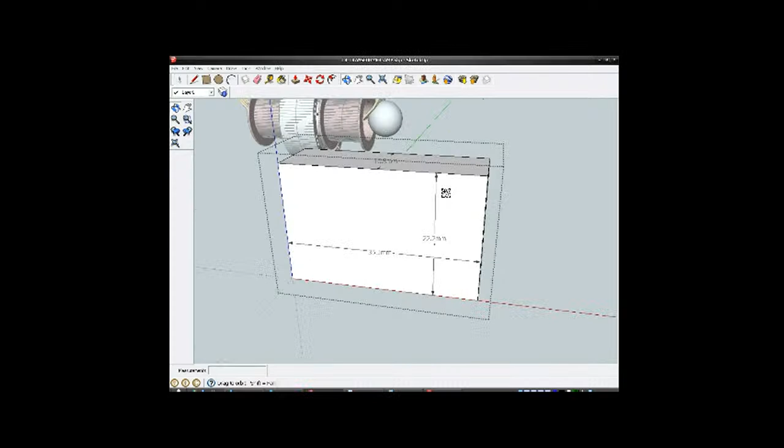Okay, so I've got to make these corner brackets. I'm using this rectangular box I made earlier. I've got the chat open on the phone, so I can see chat on the phone. So what I've got to do is make this box rectangular to begin with.

The balls are 20 millimeters, so 20 millimeters minimum. I'm going to calculate the size of the square which I'm going to use to make a right sort of corner bracket. And then I'm going to be using some ferrite rings as a coupler.

I don't want... my back's playing up again today.

I don't want the ends of the rods coming into contact with a round ball, round surface, because that creates a whole bunch of problems. So I'm going to use a ferrite ring to basically push up against the ball bearing, which will help give me a flat surface where I can intersect with the steel.

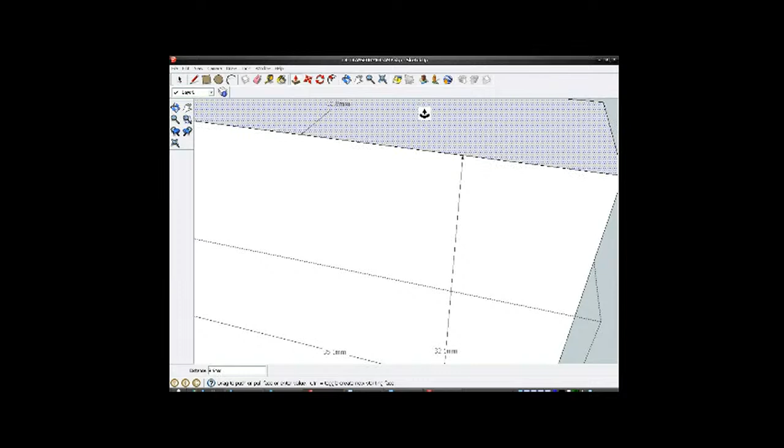Let's see, I'm gonna go up to 32. Oops, if I can get this right. Damn it, my mouse is jumpy. Right, that's 32 that way. That one's too big, so that one wants to come down. Right, so 32 by 32.

So if I've got a ring on there, the ring diameter is 21, we'll call it 21.83, but we're going to call it 22. I want a bit extra on there. So that wants to be actually half of 22, because this is half of it. So half of 22, that's 11, so that wants to come up to 11 millimeters.

So that's what I've got there. I'll just zoom in case you can't see it. So I've got 11 millimeters that way. 32, 32. Right.

Now I need to create a wall. So I was saying 2 millimeters, so I'm going to go in 2 millimeters. Oh yeah, that should work. Let's just carry on. I need another wall here, 2 millimeters.

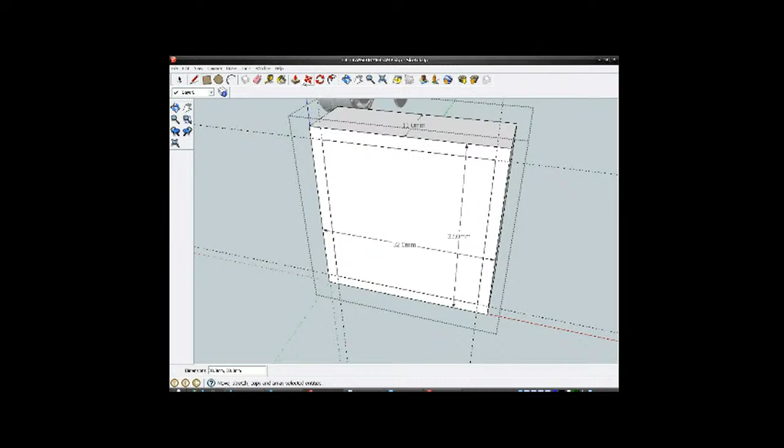I'm going to think about this carefully as I'm doing it, because I don't want to make any boo-boos. Right, next phase is to create a box inside a box. So I want to go across here to there. I'll push that in 9 millimeters. So I've got half a box there.

I was thinking about this last night, trying to work it out in my head, how I was going to go about doing this, and after a while I just couldn't get to sleep because I was spending too much time thinking about it. So I decided I'm just going to forget it and do it tomorrow. I'll just do what I'm doing now, because it's easy to adapt your design as you're going through it.

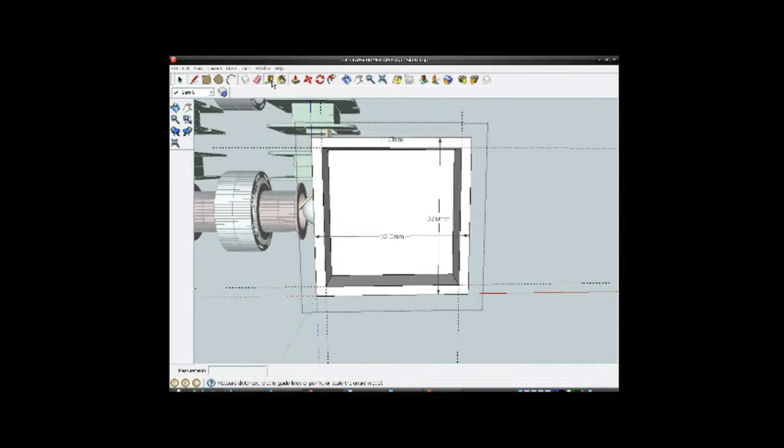Right, so we're going to have half... let's see, if I have to make it slightly bigger or smaller I can do that, but we just need somewhere to start. Right, the ball is 20 millimeters, so that means I want to come in... let's see, I'm going to come in at 11.

Oh, hang on, because of the thickness of the... no, I forget the thickness of the wall. So I'm going to come in 11, that way as well, and the ball will be on the corner. I think that's right.

Let's just try it and see. So that'll be 20. No, sorry, 10. And the ball will be 20. So that's where the ball would go in, right? It would sit between two. But I want to have that open-ended so it's springy, so I'll show you what I mean in a minute.

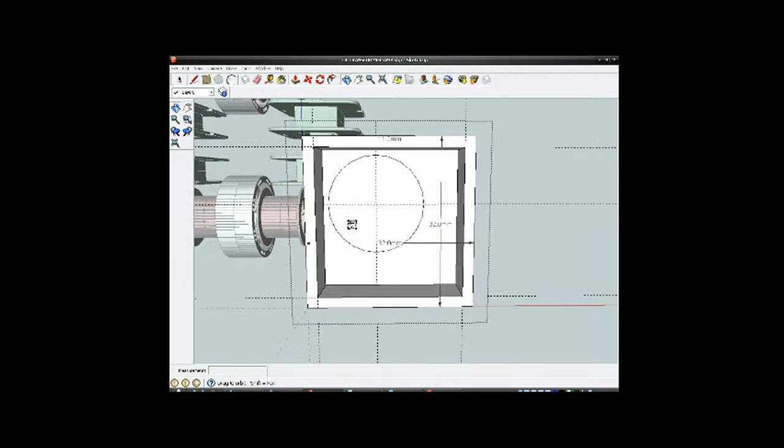So what I need to do is measure between there and there. That's 7mm, so let's see, better if I measure it from the other end. Well, it's 7 plus 2, so it's 9, so I need to come 9mm up here. 9.

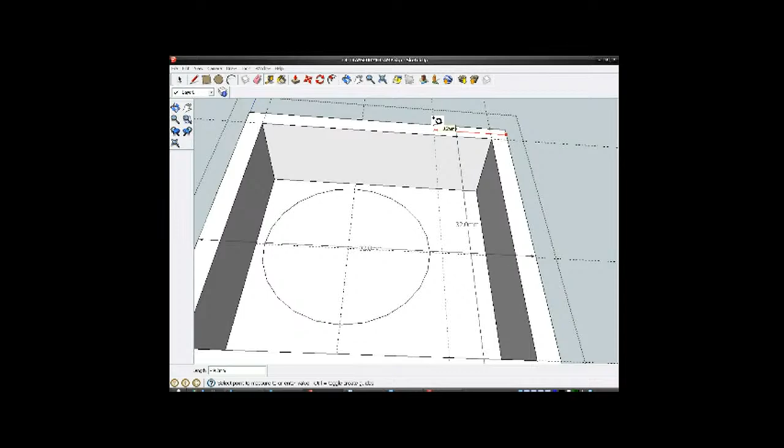I need to cut that. I've messed up my measurements now. I'll have to get rid of those in a minute. Let me just erase those things because they're jumping all over the place.

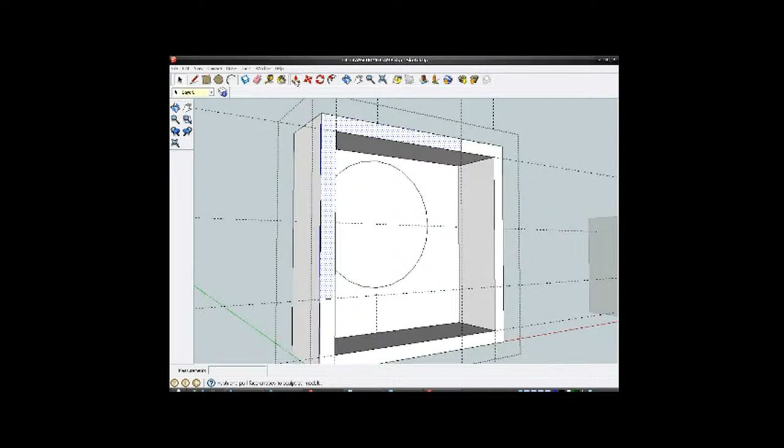Right, so I need to bring that ball down on those. This is half, there'll be 2 halves to this, so I'll bring that wall down to the surface like that. And the ball will pop in between those 2. Let's just push this all the way through. Right.

Just take that out. Right, so that's half. It'd be easy to print 2 halves and stick them together, you see. So basically I have to think about this as half of a bracket.

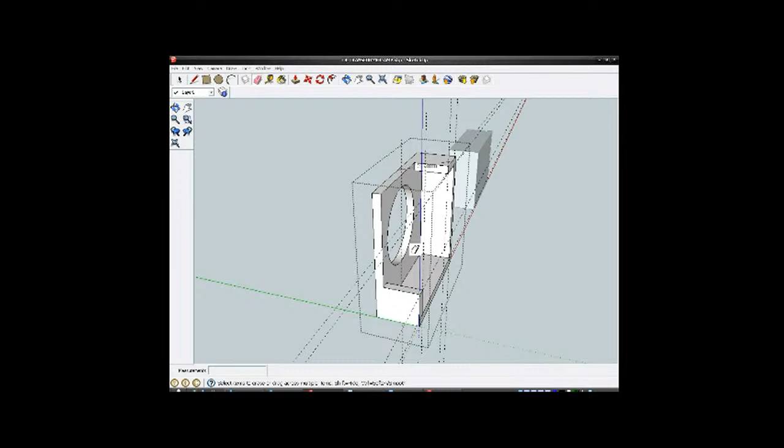I've got a lot of lines now, so I'm going to get rid of all these lines. Delete guides. Right, so the ferrite parts are going to be fiddly. They're going to be really fiddly, to get them just right, because I need to be cutting half a circle basically.

Oh, actually I need to go back. I need to undo some deletions because I've just realised something. Go back. I'll leave that line there. Right, I'll just get rid of the guides again. I'll show you why.

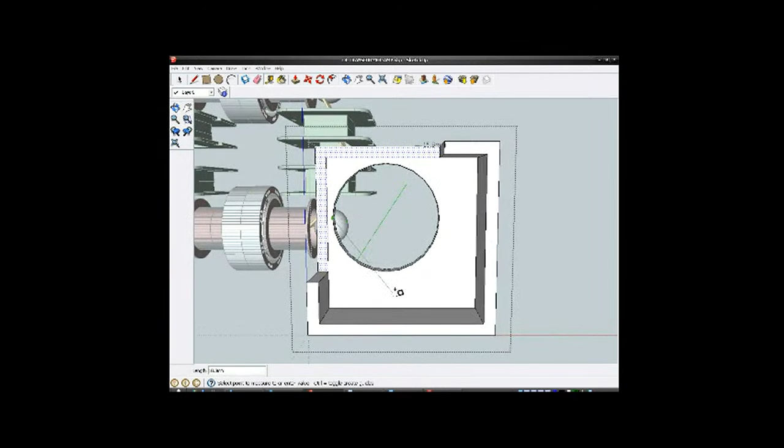I need some slots in this for the ferrite. Let me just measure the distance here, between there. That's 3mm. Oh, actually no, it's in the wrong side.

Ferrites are 8mm, and they'll be going down this way. So yeah, those other lines need to go. So that one, that one.

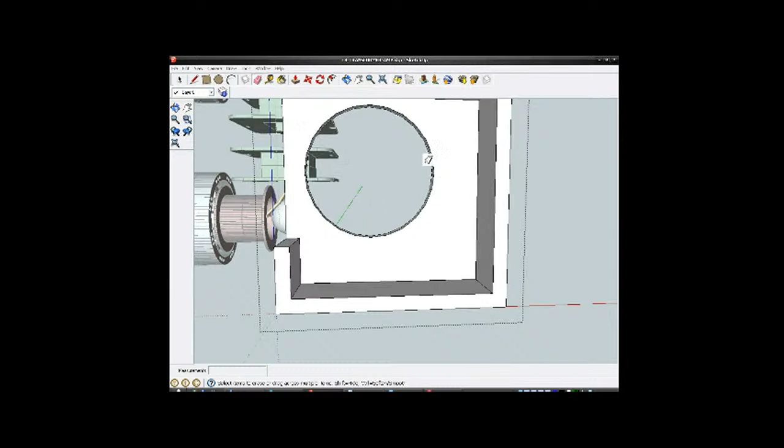So yeah, that's okay. So let's see. I want the centre. I actually need to make that circle a little bit rounder, but it'll be alright. It's alright. So I need... let's see, that's 8, that's 9, so yeah.

I'm not sure I've got this the right thickness. The ball's going to be 20mm. It's going to be sitting inside this, so it's going to be recessed slightly. Actually, that hole, I've just realised it's too big because the ball's just going to fall straight through it. Damn!

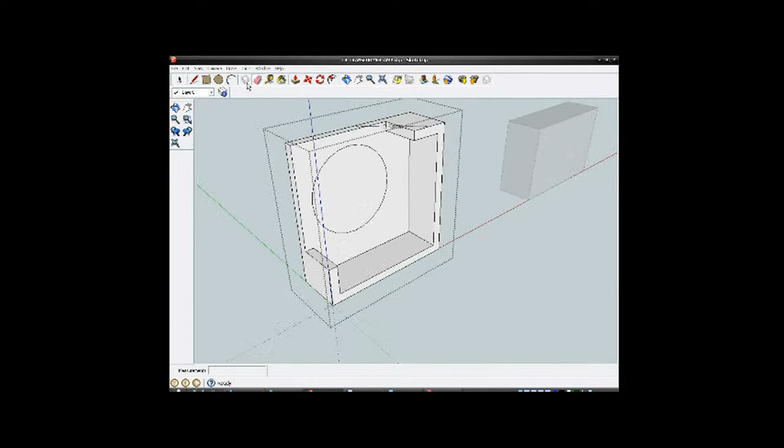I just realised what I've done wrong. I need to find the centre a minute, hang on. Yeah, the hole doesn't want to be the full diameter of the ball, otherwise it will fall out. So it can be a bit smaller, so it wants to be, let's call it...

Holy, my ruler's not working. I'll just cut another circle, just a minute. So it wants to be... yeah, about, we'll call it 5mm. Because that's 10mm diameter. That's half the size of the ball.

Right, get rid of that line. Punch through. Right, so the ball will sit in that hole without falling all the way through. You have to push the ball in there and then intersect with the... Now this confuses me, this bit, because depending on how deep the ball sits will depend on the alignment.

You know what I'm going to have to do is I'm going to have to print this out really, because I can't figure it out. It's very complicated because the ball's round and it's sitting in a round hole.

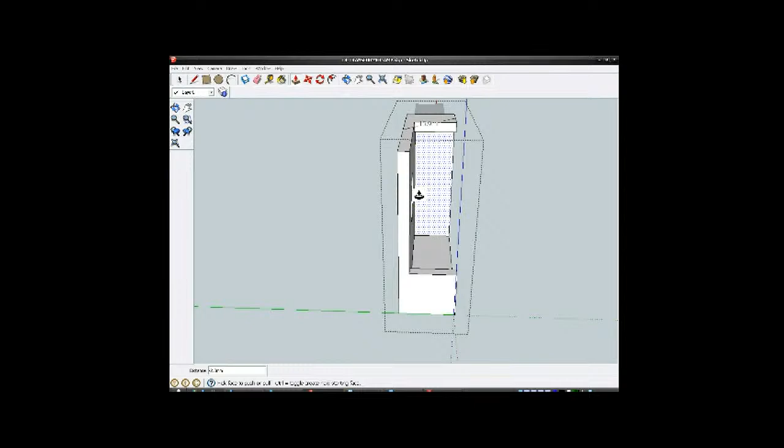It's going to be recessed slightly, so the ball itself will actually be offset from the centre axis, if you know what I mean. So the line, the actual middle of the ball, will be further down. And so what I'll have to do is I'll have to print one of these out and take some new measurements to work it out, because I can't figure it out in my head. It's just very complicated.

Because I've got to line up the ferrite rings to lay on the ball, and to do that, to make the part where the ferrite rings are actually coming through here, actually get that in the right place. I could take a guess, I suppose, because whenever you're working with something round, it's always complicated.

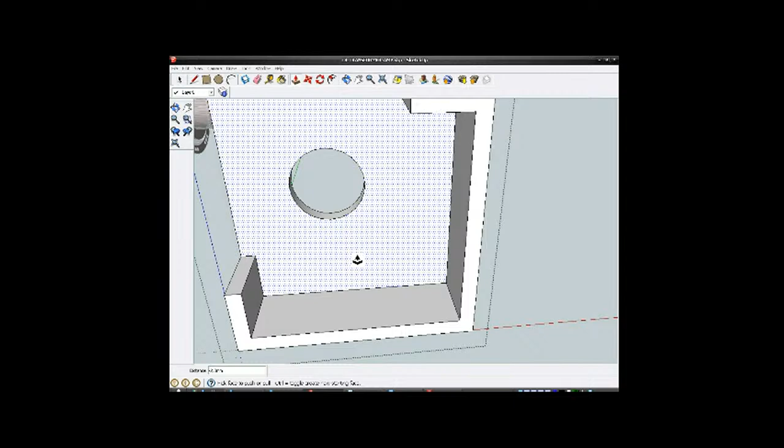When you're working with straight lines, rectangles and things, you've got straight lines to measure. Round surfaces are very, very geometrically complex, and I get confused with math. I really do.

So let me get rid of that measurement because I don't need that now. Right, okay. Well, the alignment between this for this is okay.

So if I bring some lines down here, right, I've got some lines down to the bottom. That will be okay. It's just the distance between this wall here. Let me just check the distance between that wall there and this halfway mark here is where I'm going to have problems.

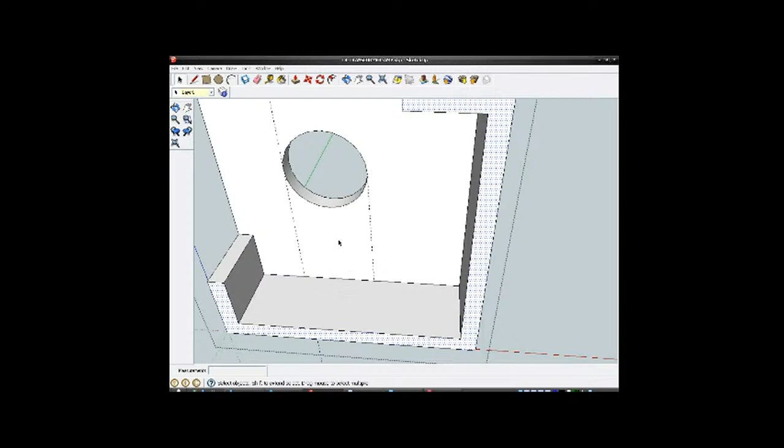The part I'm confused about is how, where the centre is in this plane from the back to the front. What the centre point will be. Right.

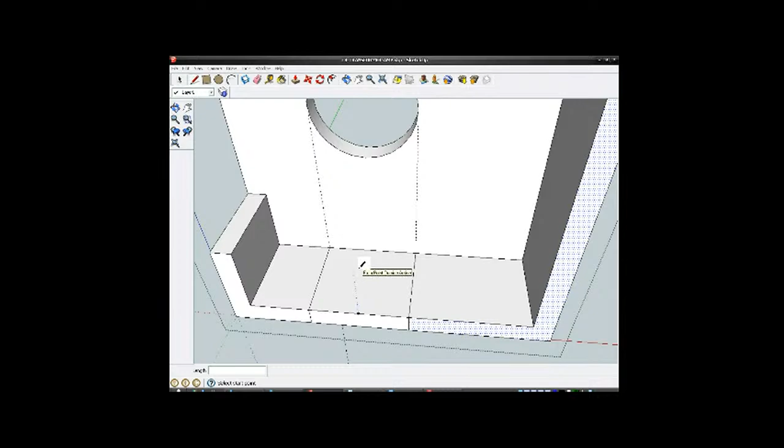Oh, actually, I've just thought of something. I could make it adjustable. So the ferrite ring, when it sits in, it can be moved around. I could do that. So the ferrite ring, because it's round, would be - let's see if I can find the centre on this. Let's see what the centre is. 10mm, so it'd be 5mm right there.

So that's the middle 5mm point. But I don't know where the centre going on this axis would be. I suspect - because I've got that - this wall needs to go a little bit further back anyway.

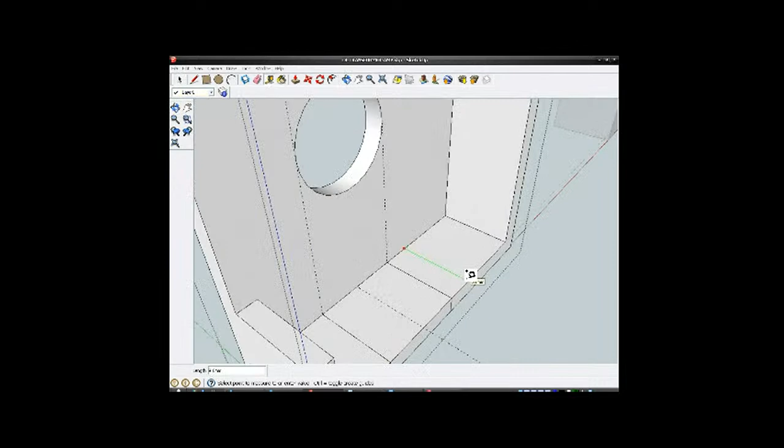Right, so my ferrite ring is half of 21.93. Well, half of 22. I'll call it 10 because there's going to be some expansion on the print anyway. So this should be from there to there, should be about - well, it's 9, so that's not far off. I'll leave it at 9.

I think what I might actually do is make some inserts that can slide around a bit. I can get rid of all those lines now. What the hell? I'll just delete guides.

Right, so this bit here - what I'm going to do is copy that. I'm going to have a little piece. I'm going to copy that piece. I'm going to make a hole.

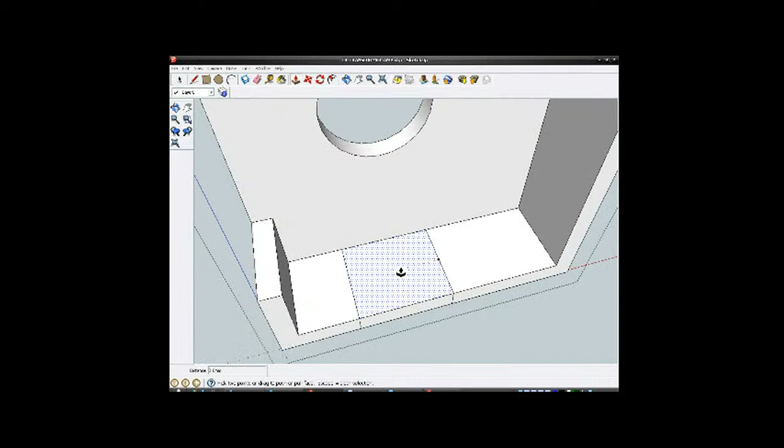Alright, now I'm going to select all, make a group. Right, that's a group now. I'm going to paste that piece back in, paste. Oh! No, I want to paste in place. Right, I'm going to make an insert.

I'm just going to extract this back out. Now I'm going to select all of that. Make group - so that's a separate piece now. So I'm just going to hide this, hide that. Edit that, and I'm just going to shrink it a little bit to allow for expansion.

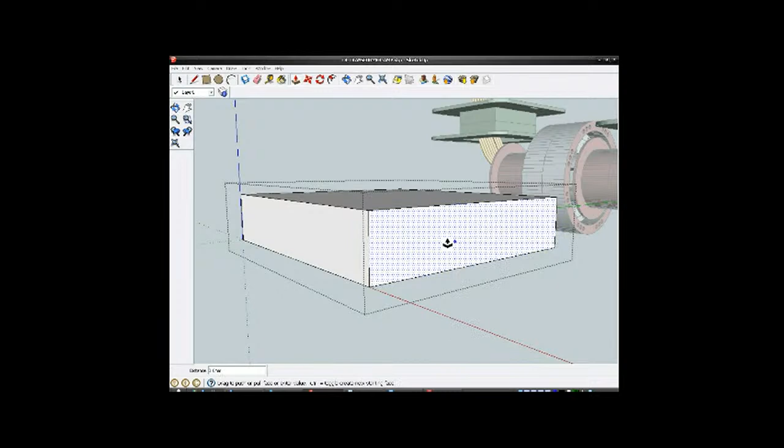0.1. 0.1. 0.1. Right.

Close that out. Let's bring the other piece back. Unhide. Right, now we have a little piece that comes out. It's got a gap of 0.1 millimeters on each side, even at the back. Oops. Right, so that piece can be stuck in separately.

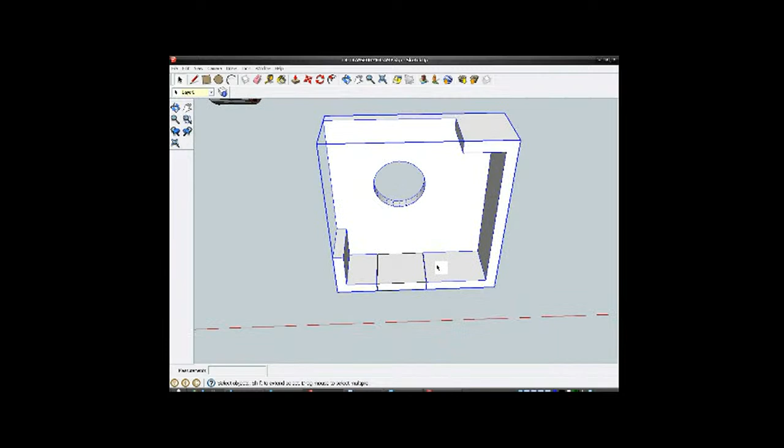I can always make it bigger or smaller later on. I'm going to figure it out because the actual ferrite is going to be 20 millimeters. How big is that? That's going to be too small. Shit. Too small in that direction. It is. Damn it. Alright, so what I'm going to do is 9.8.

Just a minute. 20 minus 9.8 is 10.2, divided by 2, 5.1. Right, alright, so hide that.

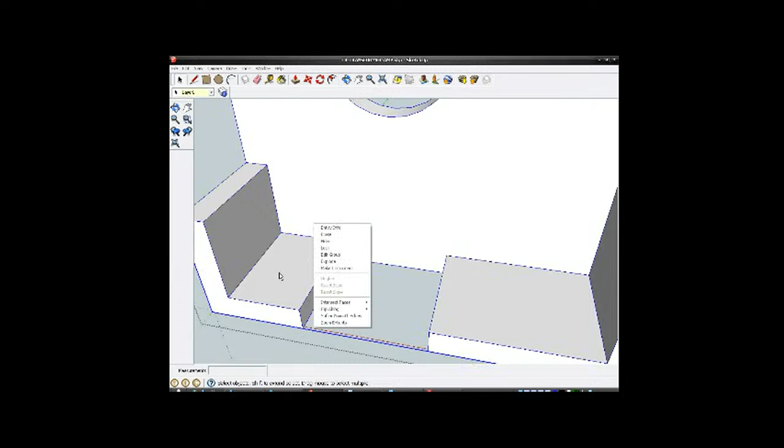Edit group. So I want to move that. Edit group, I want to move that 5.1 that way. Oh, that'll be alright. 5.1. 5.1. Bring my insert back.

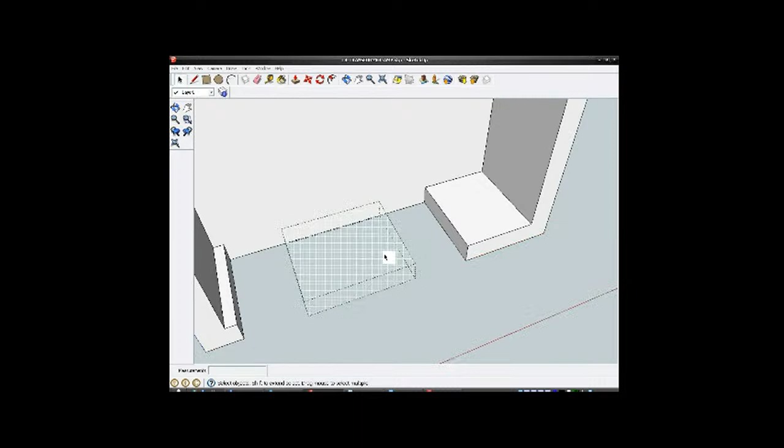What guides in there? Three guides. Yeah. 5.1. Right, alright, I've sorted that out. So that's centered.

Right, so this is half of that, so the ferrite ring will be facing - how deep will it be? It will be... so... this is fiddly, it really is.

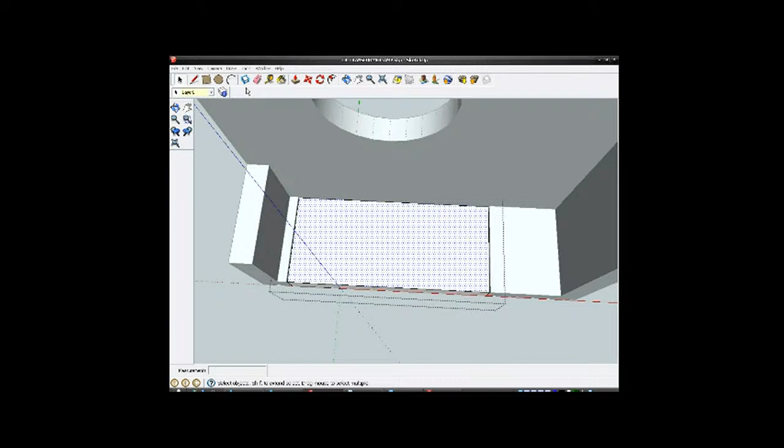So in this section here, edit group - I actually need a tube, because the steel laminations are going to be threaded through. So I just need a tube in here, half a tube. Let's just get the middle of this.

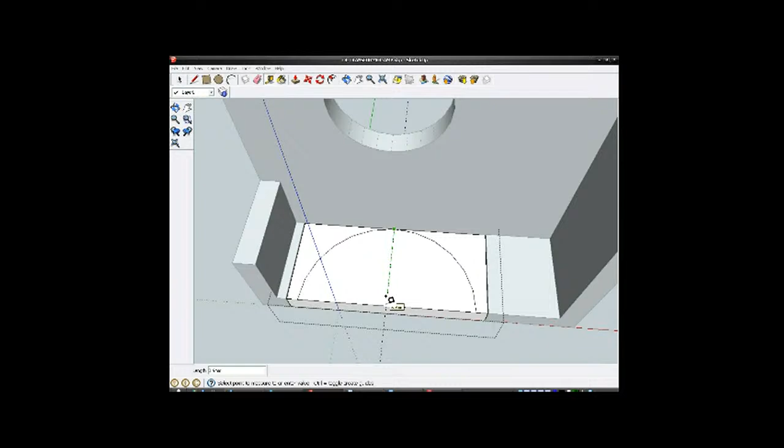So I need to be right on this tip here, and I need to - I'll do that. Let's just cut this other bit off I don't want. I think this is going to work out. I can always make that hole smaller because it'll be a snug fit anyway. That's another thing I can do.

So this is the insert, by the way. So when I 3D print the whole thing, I'm going to ignore the insert for now because it can be slid forwards and backwards. So I'm going to push that through.

Oops, what have I done now? Start again, I must have got a double face on here. Erase - nope, I didn't. Alright, let's go through. Right. Why the hell? What's happening here? Oh, I see - undo. Let's have a double face on here.

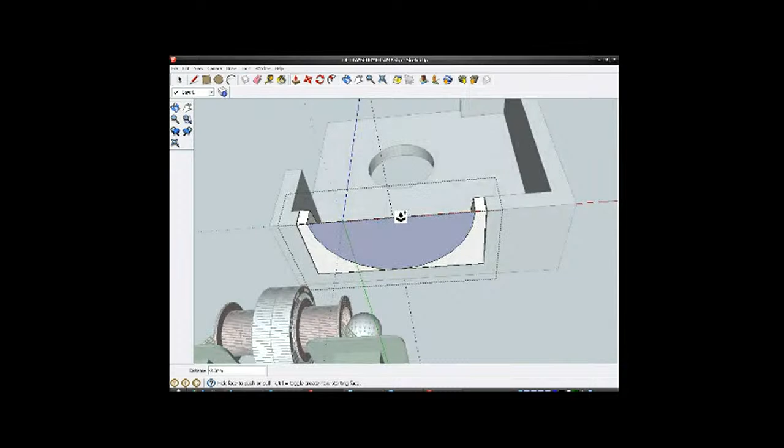Erase. No? What the hell's going on here? Why I want that to come through? Huh, that's weird. I'll just delete that. Alright. Select all. Intersect faces, model. Just make sure there's no holes.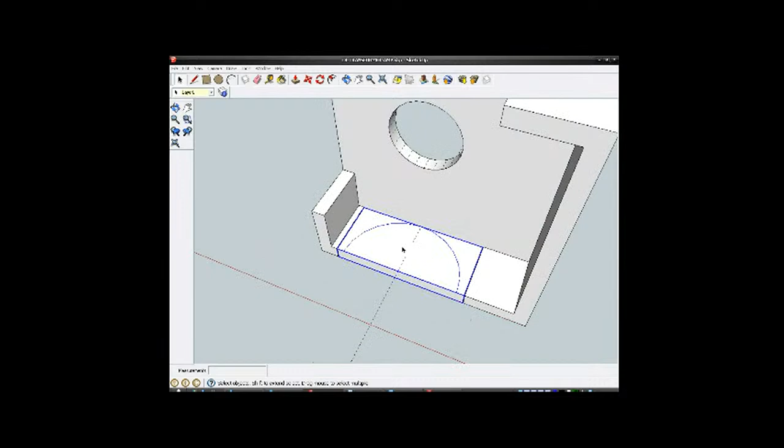Right, that's where the ferrite ring is going to go, but I also need a tube. Oh shit, I should have done the tube before I did the hole. Hang on a sec. Undo, undo, undo. Right, I'm going to close that out a minute, because I need a tube. I want it a separate piece.

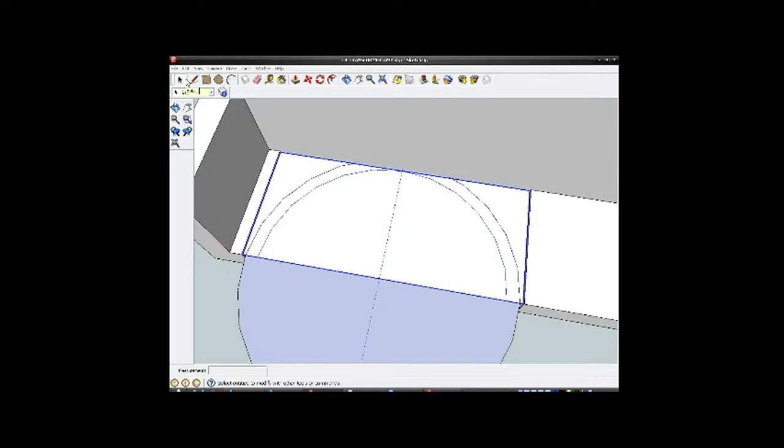The tube wants to be a little bit bigger. I'm going to go up to... I'm going to go up to there. I've gone through that wall now. Oops. Be alright, let's see. Well, I'm going to have to... we'll have to make some adjustments, I think.

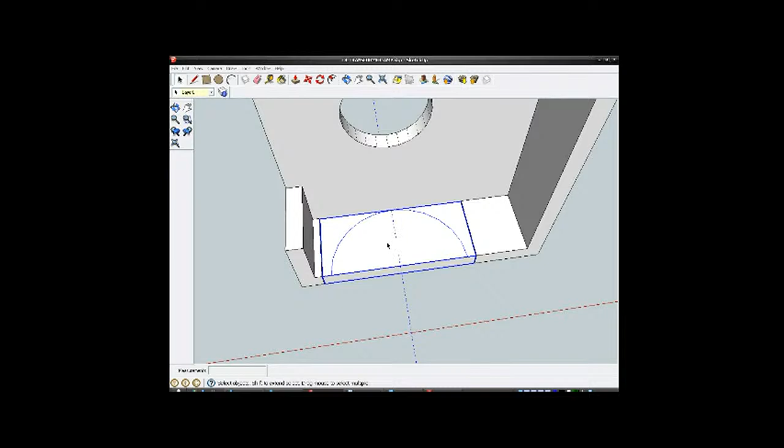Oh, actually the tube can be the same diameter as the ferrite ring. Ah right, so undo that. So really I don't need to worry about that because all I have to do is... let me go through again. So technically all I have to do is lift this up. Well, that becomes the tube, half a tube, silly me, do it.

Right, so select all connected, intersect faces of the model, because there might be a break somewhere. Well, it definitely fixed something because it would have said nothing found to fix if there was nothing to fix.

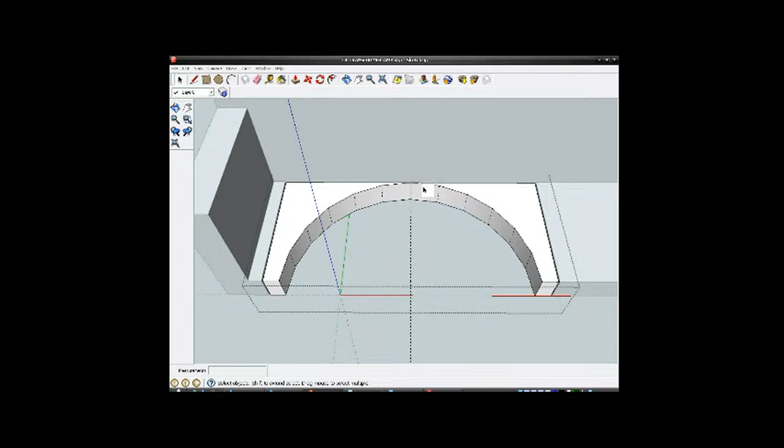So all I have to do with this insert piece is lift this up, lift that up to the height to meet the ball bearing, which is sitting in between. So if I bring that up to there, bring that one up to there, that becomes a tube, and the ferrite ring is sitting in half this section.

Let's just take some more measurements here. Yeah, it'd be a lot easier if I actually had that ball more in the centre. So what I'm going to do is make this hole smaller, because that's a 2mm wall.

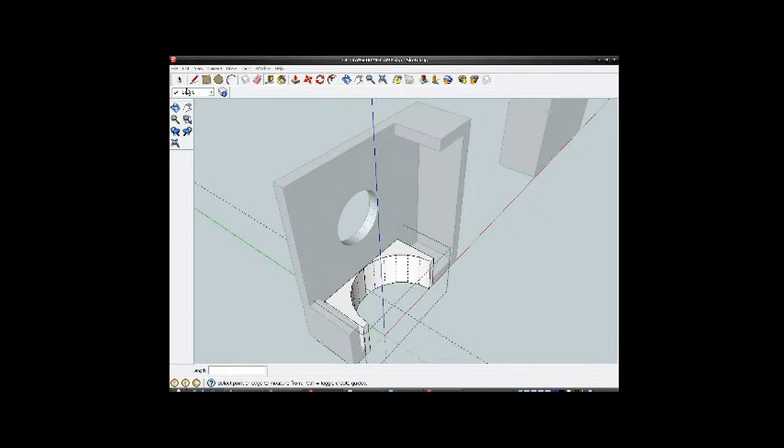So if I edit the group, just make that hole a bit smaller. Oops, what have we done? Oh, edit group, right, I was in two groups for some reason. I want this hole to be a bit smaller.

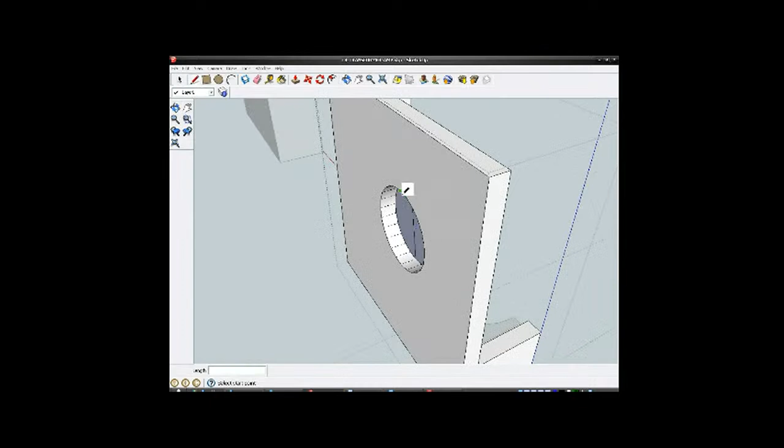Let's find the centre. Let's have a 6mm, that's too small. 3.5... that's 7mm. Alright, I'm going to go with that.

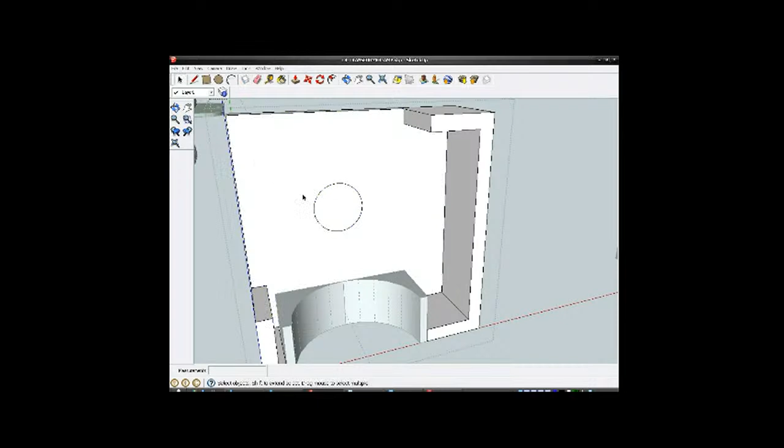So the ball will sit right in the middle of there. And this thing here also needs to be on this side as well. So, actually I'm going to leave a face on here because I'll show you why in a minute. I want to pivot around the axis of the ball, so I'm going to leave a face on there. I'll show you why, because I'm going to come out of that.

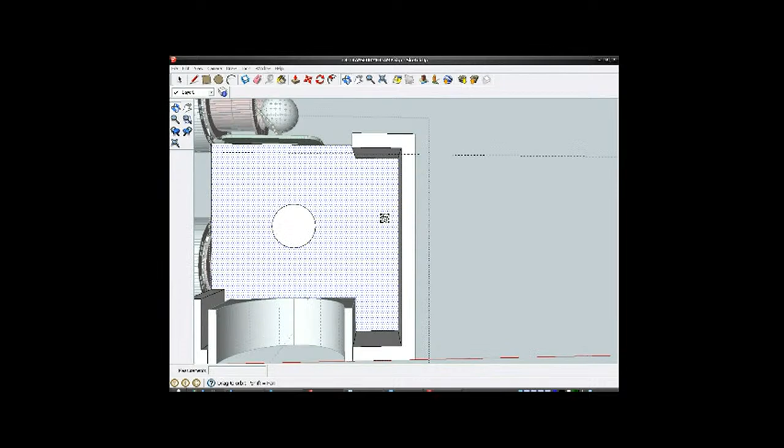And 2.9 that way. 2.9, and the other side is 8.9. I think I've got that right.

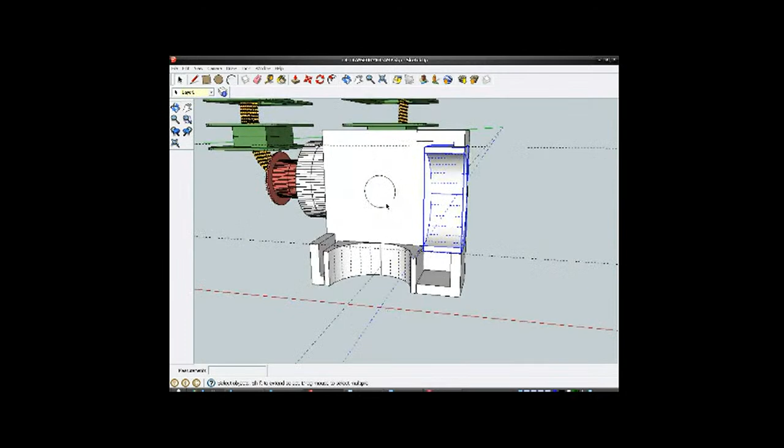Right, I'm going to copy that. 90. There we go, got it. So that's my right angled intersection with the ball bearing, which will be in the middle. Now I can get rid of that. I can unblock the hole again, so there's that. Delete the guide. Right.

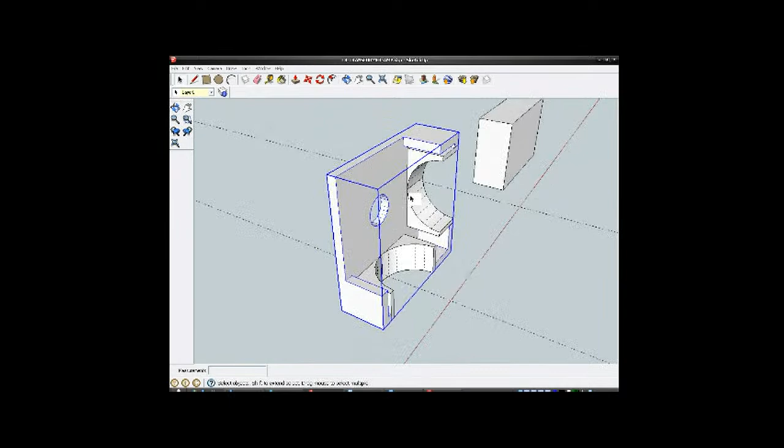Yeah, I'll have to print one out to test it, and actually I need two of them, to be honest, because you can't do it properly with just one, since it's half of the holder. But yeah, I could print one and fit things in and take some measurements, so that's probably what I'll do. I think that's going to work for half the corner, so I'll show it on.

So if I get that, I'm going to group these all together, make group, so everything is a group. Now, what's the measurement between there and there exactly? It's 11 millimeters, so I need to get in that corner, press the plus key, type in 11.

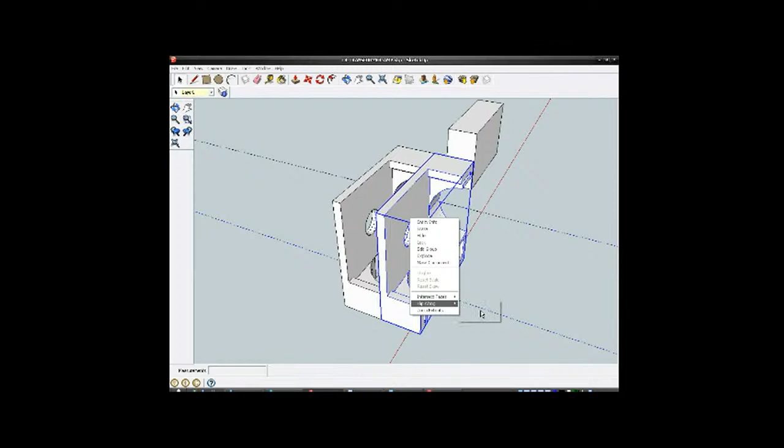Now I want to flip that on, is it the green axis? Flip along green, yeah that's right. There we go, that's the corner. Right, so that's a corner.

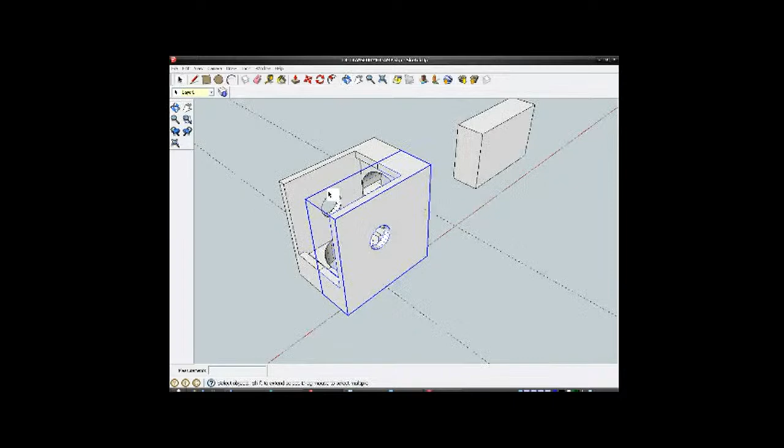I might have to make slight adjustments to this, but because I've got this in two halves, if there are issues with fitting, there's no problem because it's split, which means I can always put some packing in between them, space them out a bit more, or file them down a bit if I need to compress them to make it tighter. So yeah, but that's the idea. The ball will be sitting in this section in the middle.

I'll get rid of them guides now, delete guides. Right. Yeah, the only way to test that is to print one out. I'm going to have to do that.

This separate piece is good because if there are some adjustment problems, I won't have to scrap my whole bracket. I can just print a new insert, a separate insert part, which is why I wanted to do it like this, so it would have a little bit of lateral movement side to side.

I think that's going to work. Let's just save it.

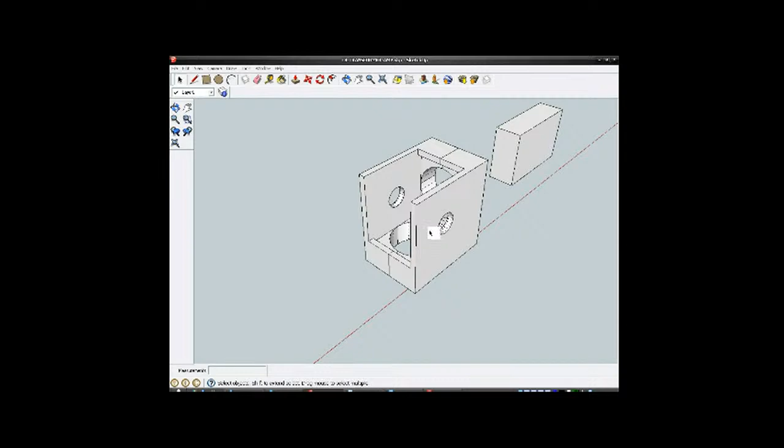The good thing about that as well is if I decide the ball bearing has got too many losses - the steel ball bearing that goes in between these two holes each side - if it turns out I'm getting too many losses on it, the steel laminations are going to be coming in this side to meet up with the ball bearing. They're also going to be coming up this way to meet up with it. So I could technically stick a rectangular piece of steel in between them to intersect the two steel lamination sets. There's other ways of intersecting the two parts if I need to. I just needed a way of holding everything together, which is what this is.

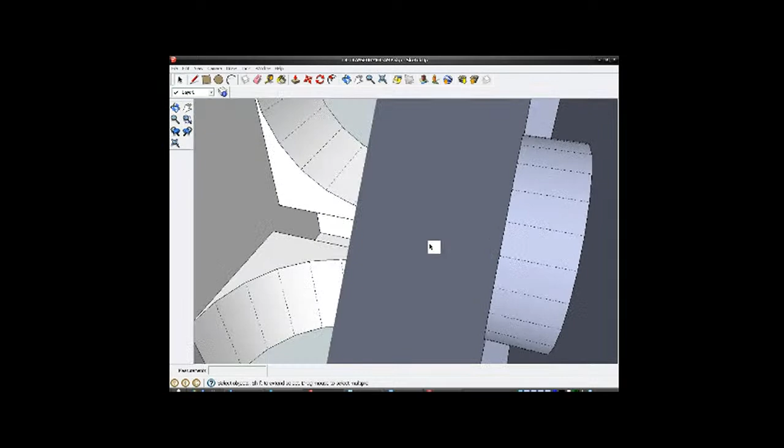I'm going to make - what I should have done is make this a component actually. I'm going to do that now. I'm going to erase that. I'll tell you why - erase, because I need to make this into a component.

Edit group. Why is this two groups? I'm just going to close group. Right, I'm just going to explode that group because there's two groups there. Edit group. Right, close group.

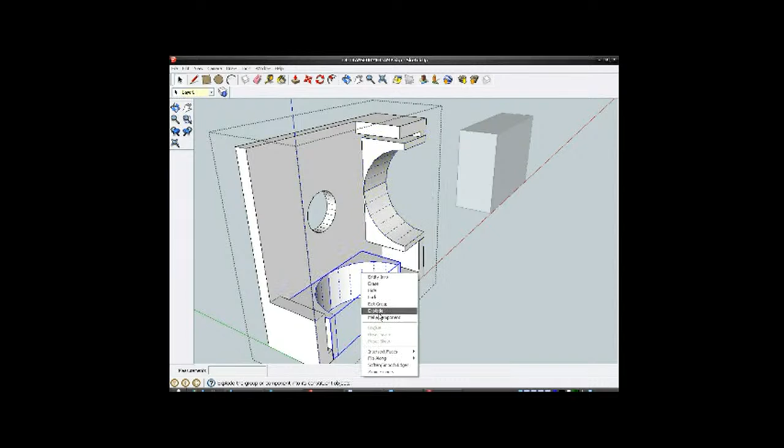Make component. Now I'll select that one. Make component. Select that one. Make component. Because when I change this, it will change the other one. Now I'm going to recopy that one - the whole thing is all linked again.

I want to go 11mm. Flip on green.

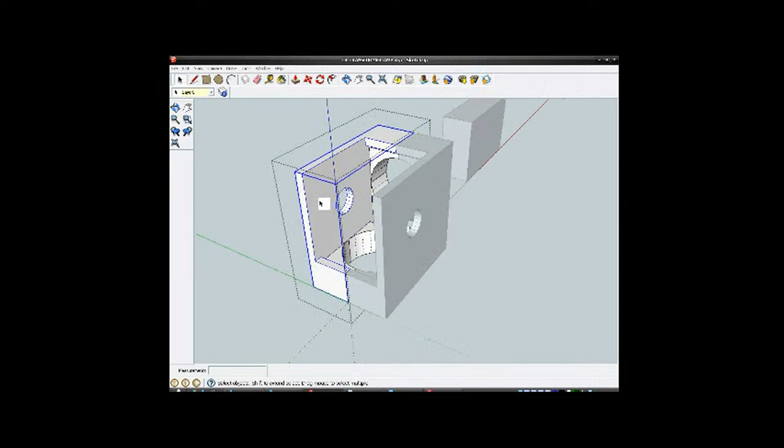Right, so now when I edit that group, edit component, now if I paint that one - go with that colour - select all, paint. It painted the other one as well, so, right, except for these other pieces that are different groups, so I need to edit group, edit component. Actually, I'm not going to paint them, I'm going to leave them.

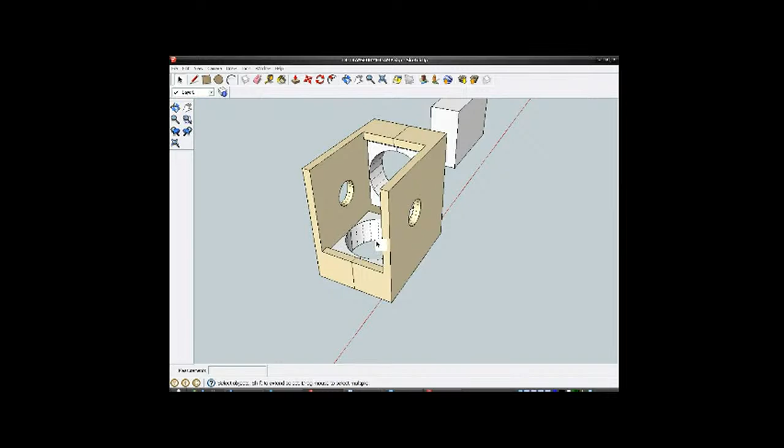So there we go, we've got a corner bracket. So I want to edit group. Right, I want to export that.

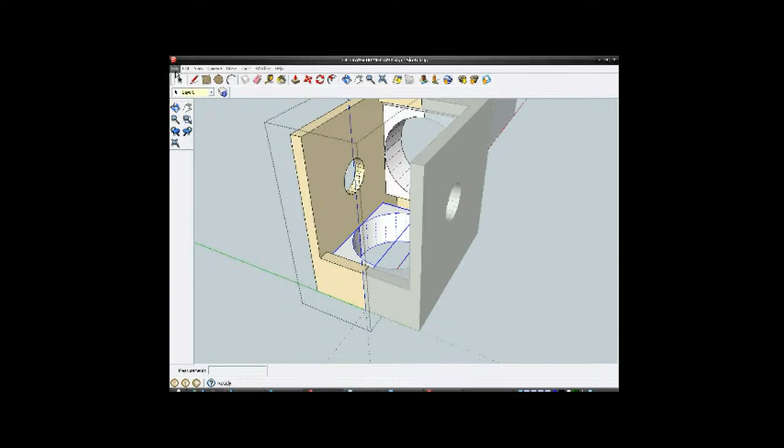What do we call it? Because there's left hand and right hand, I'm going to have to create this like 'corner-dash-bracket' and I'll call it L. That's the left hand side. These are identical, so I have to copy these, so export that one as...

Corner bracket, we'll call it... I'll call it a collet or something, because it is technically like a collet. Collet. I'm trying to keep the name short because my 3D printer doesn't recognise long file names very well - it tends to abbreviate them with a load of dashes or something like that.

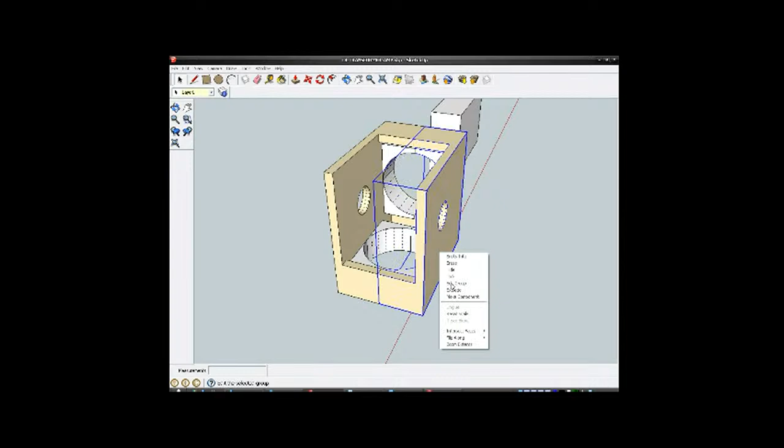Anyway, so I'm going to do the right one as well. Edit group, export STL, export as... I'll select that, then put an R there because it's the right side. R. Right, because it's a mirror image of the other one, so it has to be.

I only need to really print one of these for now, but the wall thickness of these is about 2mm, so I'd say that's going to take probably 2 hours, maybe an hour and a half to print that. We'll find out in a minute.

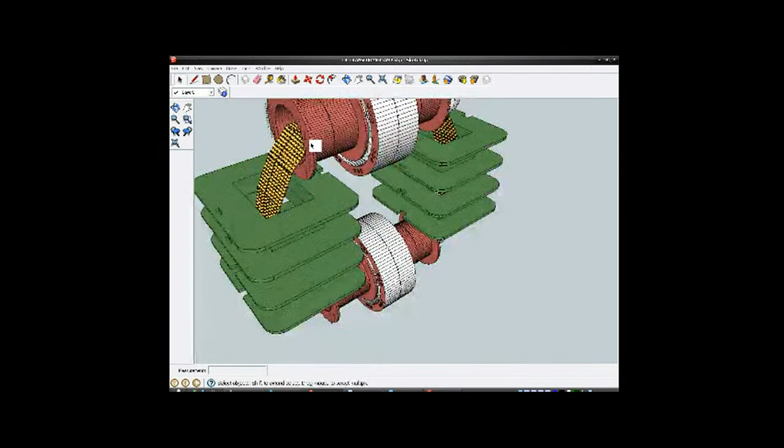And those are obviously going to go between this end coil bobbin and this one. Now the only other issue is, is it going to fit? So I need to find out.

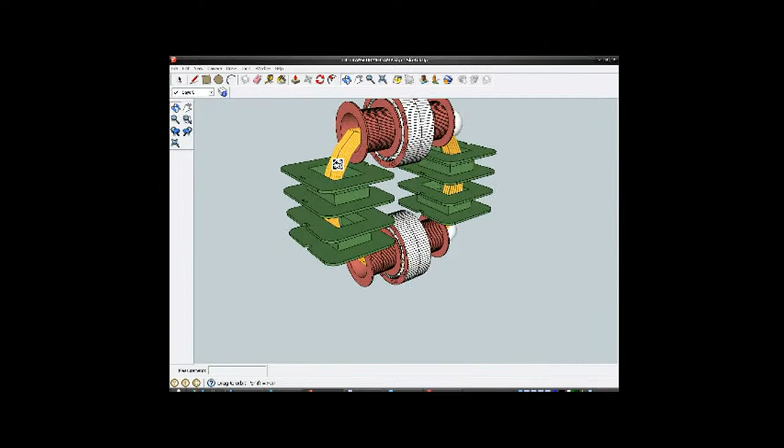So I'm going to copy them. Let me just close this out a minute. Did I group this? Hang on, I need to group both of these now. Group. Let's move - let's make a copy of that. Oops. Oops. I'll line it up.

Oh yeah, it's going to work. Just need to get a bit of fine tuning, get it lined up a bit better than this. Oops, wrong way.

Yeah, there's no point in printing it yet until I'm sure I've got this right. But yeah, my actual bobbins down here, they need to be moved out slightly anyway because they're not in the right place. These green bobbins are in the wrong place anyway.

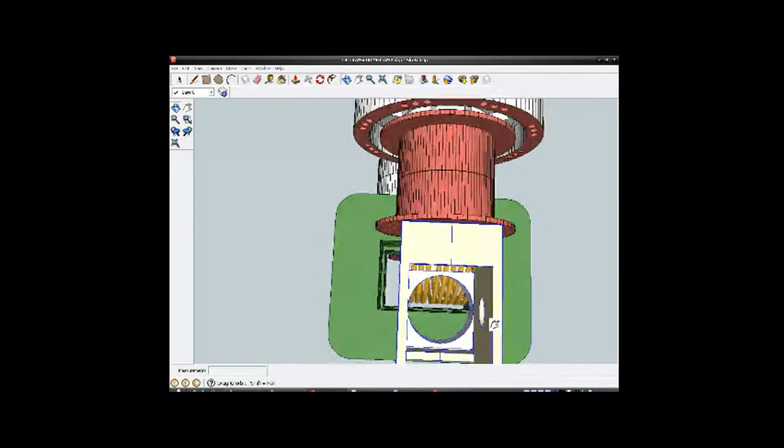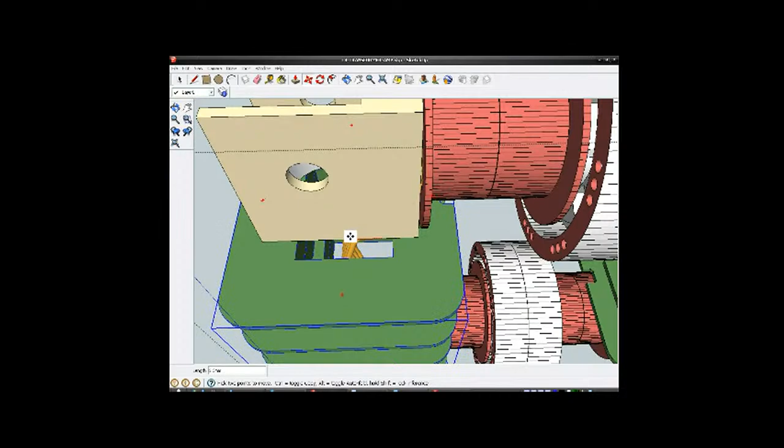You can tell that because of the wires that go through them actually. So if I cut it out, edit group, paste in place, select these bobbins - let's get these lined up right because they're in the wrong place. Oops, that's about right. How about there? It's coming down a bit. Yeah, now all I have to do is just copy that one.

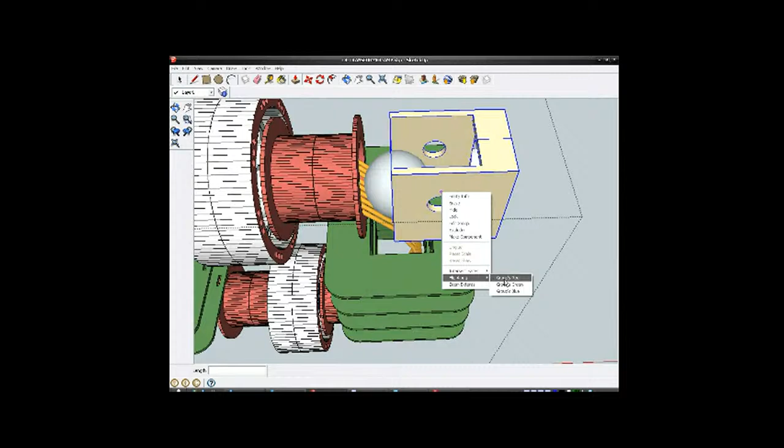Oh look, we've got a ball on this side, we can actually look at it. I'll have to flip that around as well. That wants to be flipped. Flip along red. Yeah, move it back a bit.

And the ball's in the wrong place. Move the ball. Oops, wrong one. I want the ball. What the hell? I want the ball.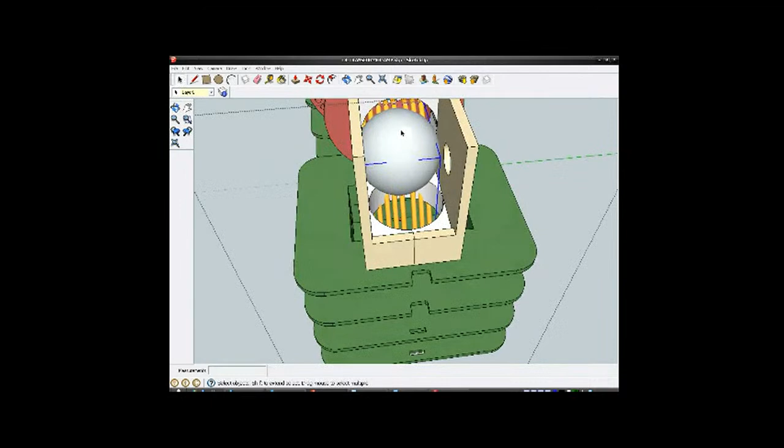Oh, edit group. I want the ball. Oh, the ball's not in the group, that's why. Ah, that is. Right, now move the ball.

Move it up a bit. Oops, it's snapping a bit. I don't want you snapping on me. I'll take 0.5. That's better. It's still not right. Too low. Bring it up a bit.

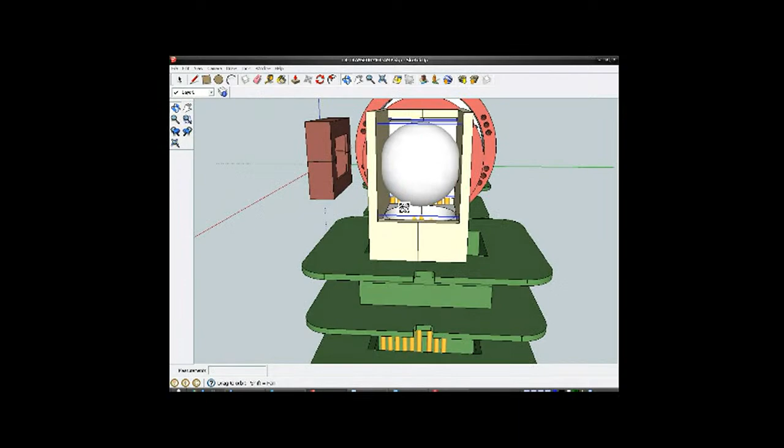Oh, I just realised something. I can use the virtual ball to check measurements and alignment. Duh. Yeah, so I don't even have to print. I can test it because this ball is the right size, I believe.

Yeah, I think it's a 20mm ball. Let me just measure that. Well, it must be, otherwise it won't be fitting, would it? No need to measure it because if it's not fitting, it wouldn't be the right size. So yeah, the ball does sit just right in that little hole.

And this little hole on the other side, it sits in there, so it's got to be right. Now I need to move the bobbin because that's wrong on this side.

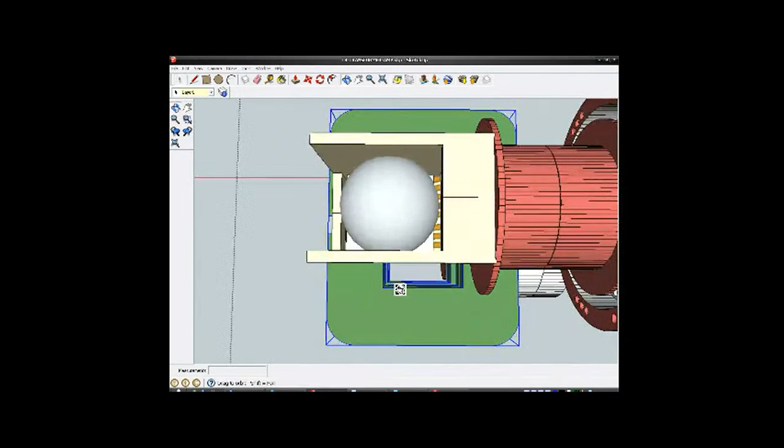Edit group. I'll look down on it. Oops, don't jump on me like that. Oh, did I flip that right? Oh yeah, I did, that's right. Let's look at it underneath.

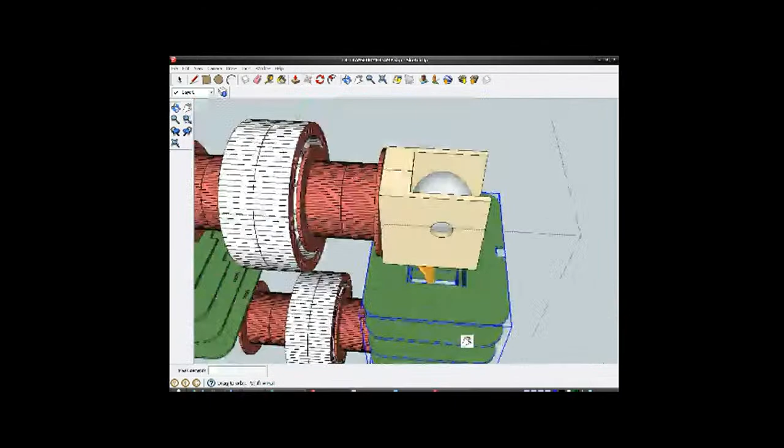It's near enough. And now what I need to do is get rid of that ball, because I'm going to group them. I'm just going to erase that other ball, because what I'm going to do is copy that ball, actually let's make it a component.

Did I make the... oh shit, hang on. Yeah I did, edit component. Yeah I did make it a component, right. Now let's, because I want to colour them in later, they'll all get coloured at the same time.

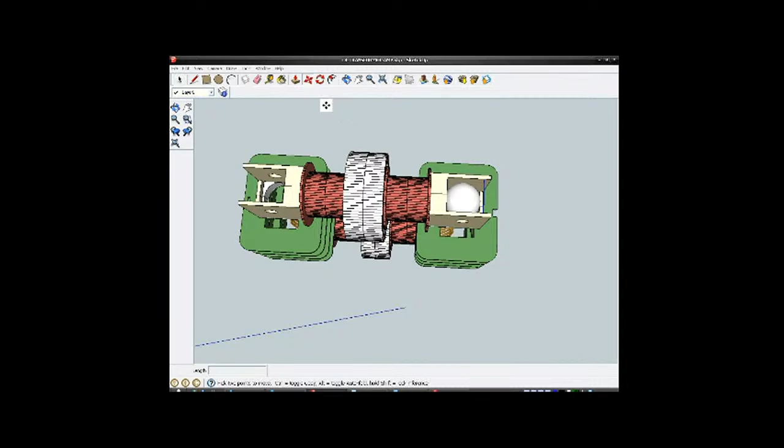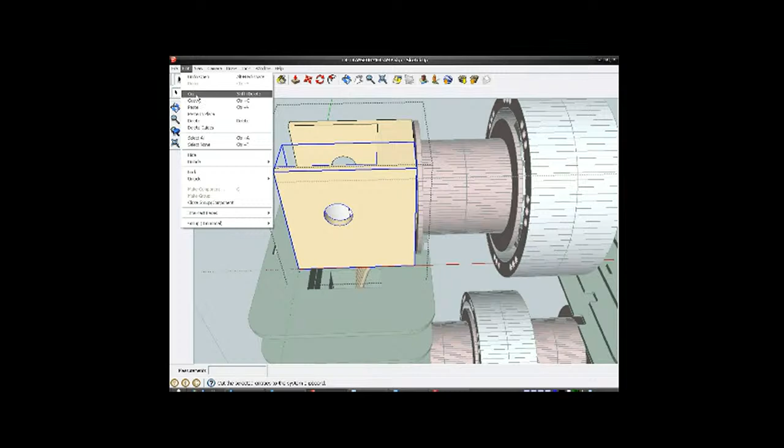I need to move, let's copy that one. Right. I'm going to cut that. Edit group. Edit group. Paste it in place. Close out.

Cut, edit, edit, paste in place, right, now edit, I've got that one, make group. What am I doing? Make group. Now I'm going to copy the whole lot.

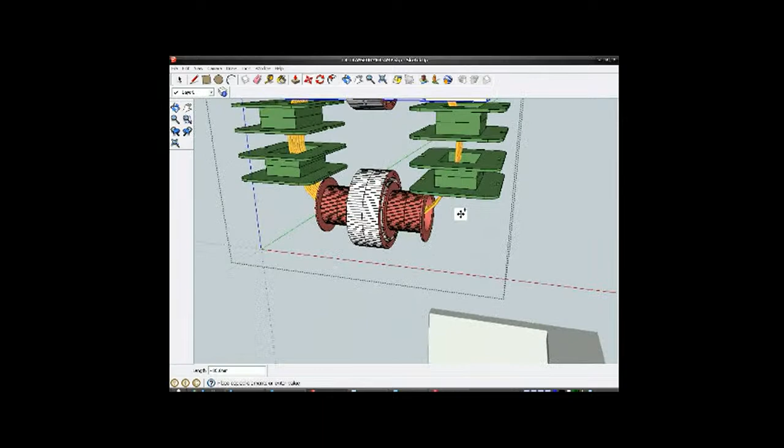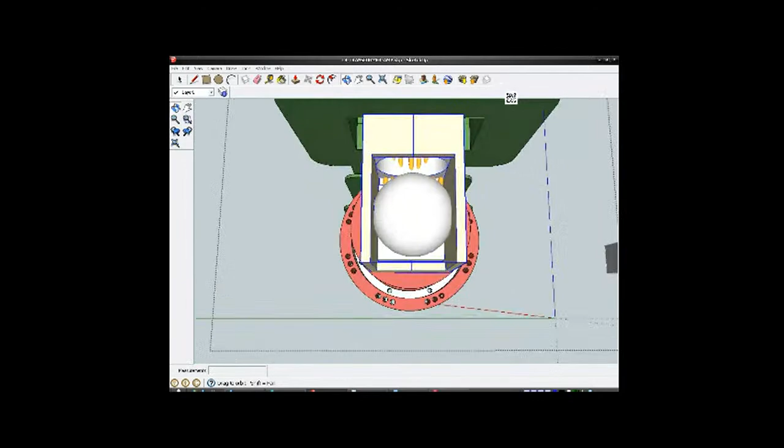Flip along blue. That's right. Move up. Oops, my mouse is getting stuck on something. That looks like it's in the middle. Right, starting to take shape, isn't it?

Obviously I've got these bobbins with a gap, and there's a reason why I left a big gap there, and that is because I might actually be using 3 bobbins on each side instead of 2, I don't know yet, but I want a bit of extra room. Ah, it's taking shape.

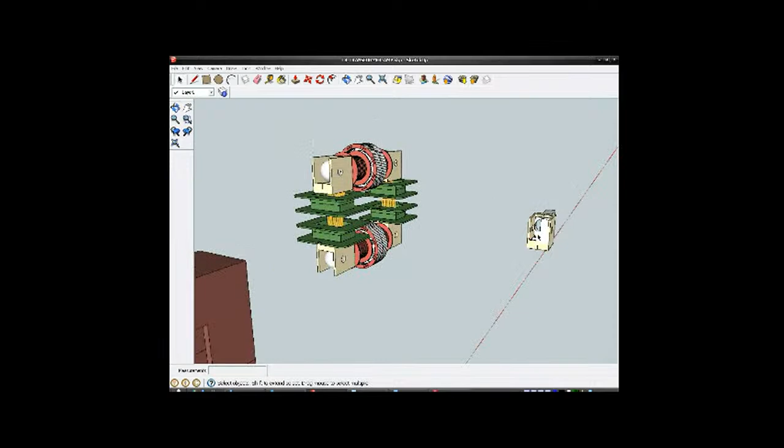I haven't put the ferrites in, but because I've made components, I can put one ferrite in one of these and it'll appear in all of them. So, if you remember, that's a copy, and this over here is the original. So if I go and edit that one, and if I edit that group, edit that component, they're all edited. Look over here, look, and this over here when I highlight something.

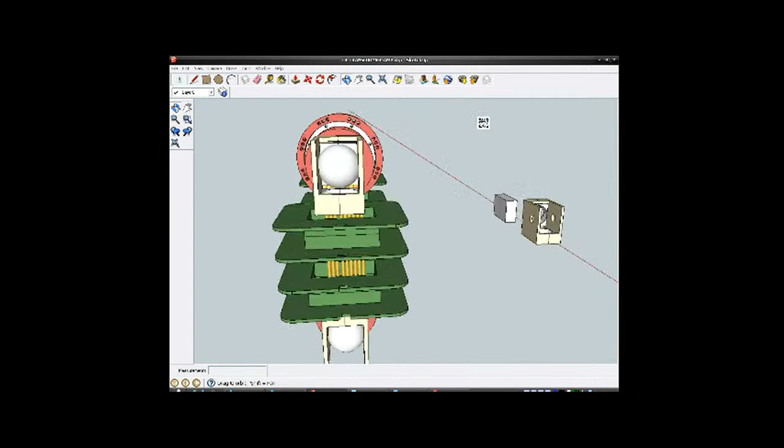So if I go like all connected, all highlighted. So when I actually stick a ferrite core in these two holes on this one, they'll magically appear on all four of those, so I don't have to duplicate and spend all my time with extra work. But I'm not going to put the ferrite core in just yet because I'm going to 3D print it, because I might have to make changes to it, you see. And if I change one, they'll all change.

Right, so there's nothing else to do right now except do a 3D print of one, and I might actually print all of it, I mean one whole corner bracket, because I mean I need to do a physical alignment test, but we're making progress anyway.

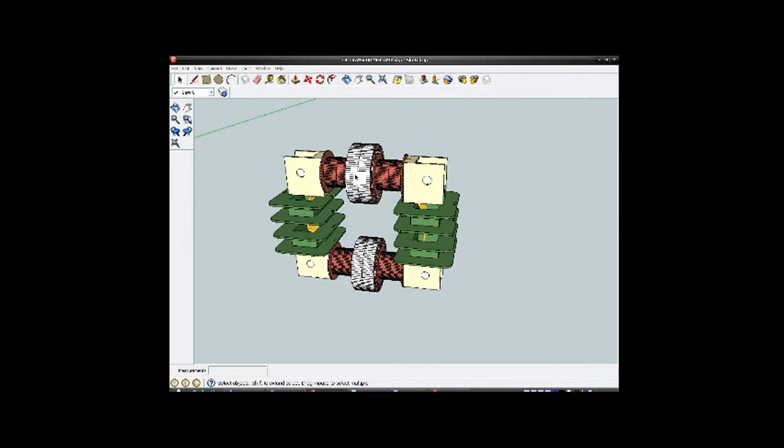My back is playing up again.